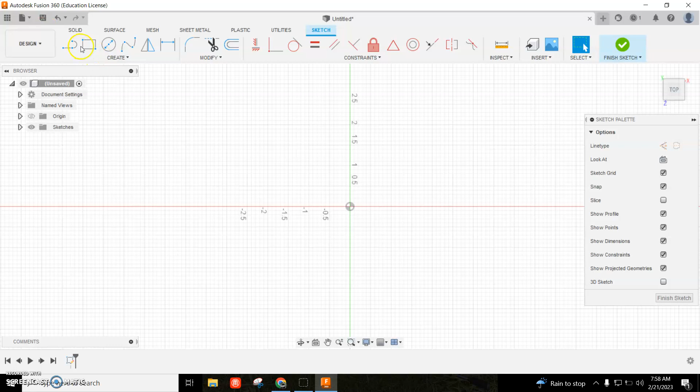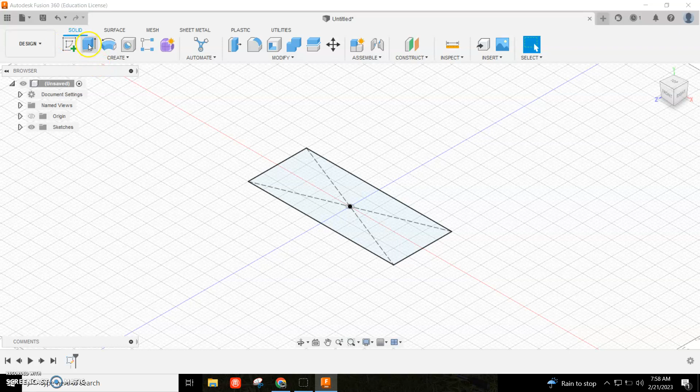So I'm going to click over to Fusion, and I'll do a center rectangle that is 5 wide. Wrong computer - 5 wide, tab 2, hit enter, finish my sketch, and then I'm going to extrude that up 3 inches. Fusion's working a little slow on me here, but I'm sure it'll be okay.

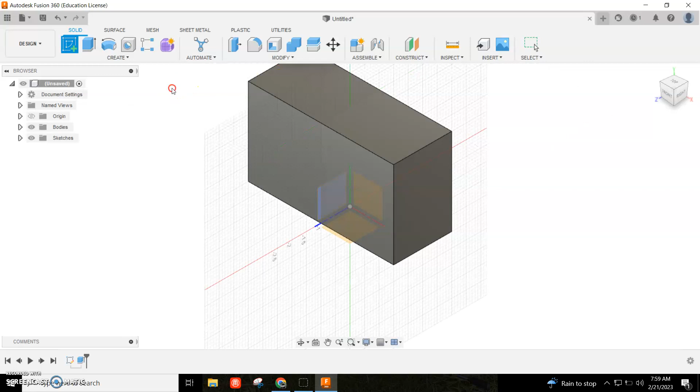Okay, now I'm going to go ahead and put these holes in. So the first hole is just a 1/2 inch through hole that's straight through. I'm going to go ahead and use the hole command, something I rarely do.

I'll go up here to this one and change it to top view, and move this onto my center line and place it right as close as I can on that center line. I'm going to make that... I'm sorry, 0.5. So 1/2 inch.

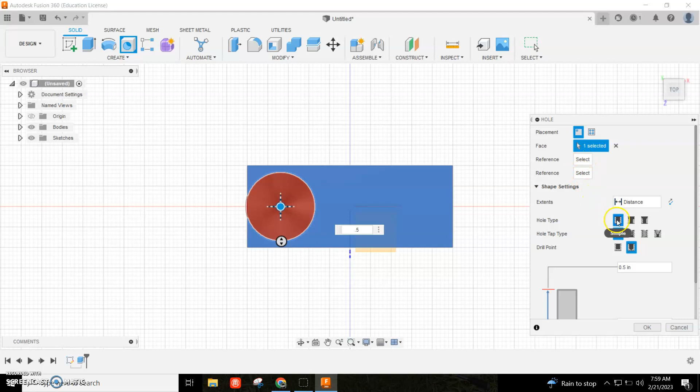And then it's going to be a hole type. It's going to be, let's see, 0.5. Depth, I need to change this to 0.5. And the depth will be 3 inches, because that's the thickness of my block, so it'll go through. I'm going to go down here and hit OK.

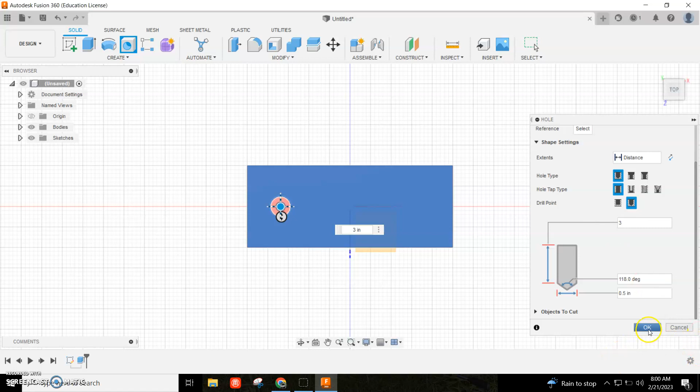Alright, so first hole's done, and that's very simple. That's just a hole. I could have made it with a circle and extruded it.

The next one is a hole that is 0.375 in diameter to a depth of 2 inches, so it doesn't go through, it only comes down 2 inches. And then it has a counterbore, 0.75 to a depth of 0.5 inches. So this is a little more complicated.

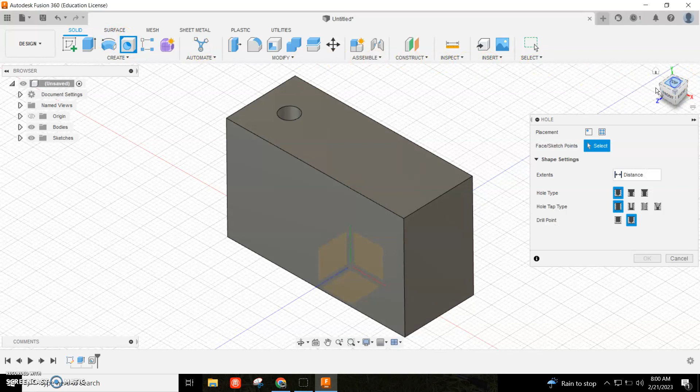So go ahead and use my hole, and then I'm going to come over here and choose that for my face. And for the depth it's going to go 2 inches down. That is a diameter of 375, so the diameter is 0.375.

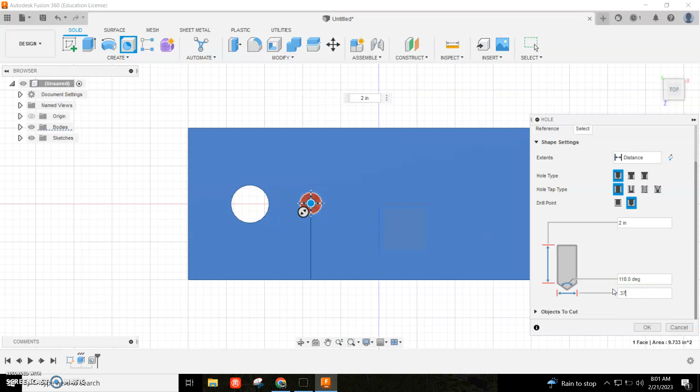Okay, I apologize, I stepped away for a moment. So on here now, I have a hole that is 0.375 inches in diameter, and it is 2 inches deep. And now I have to do the counterbore.

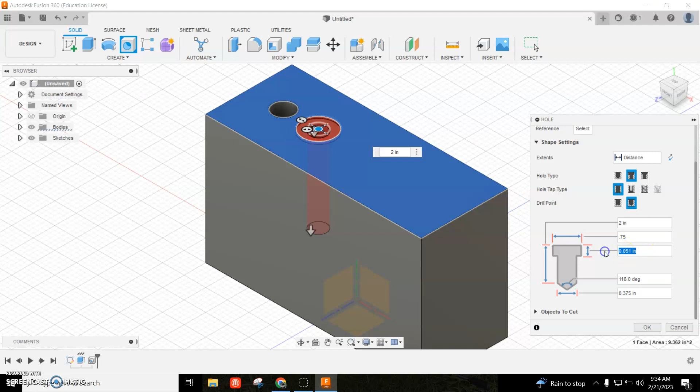So refreshing my memory here, the counterbore on that is a diameter of 0.75, and that's to a depth of 0.5 inches. I'm going to come in here and change this hole type to counterbore, and that's going to pop up some new things. So this right here, which is the diameter of the counterbore, is 0.75, and the depth of the counterbore is 0.5. So now that is correct.

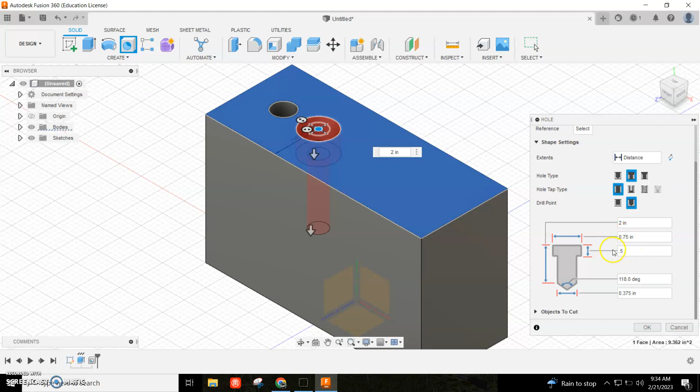So I have the depth of the hole is 2 inches, the diameter of the hole itself is 0.375... and then for the counterbore I have the diameter of 0.75 to a depth of 0.5. Okay, alright, let's go back to my sheet.

So this one is not counterbored, but rather it's countersunk. That means it goes in at an angle. So first thing I'm going to do is my hole, 0.25 inches in diameter to a depth of 2.25 inches. Alright, so put a hole.

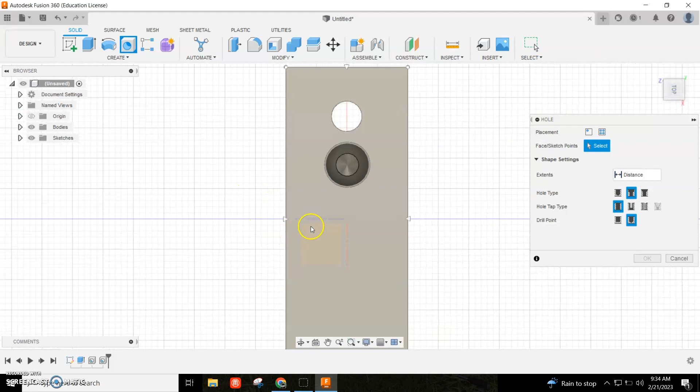I like to do the top version, and then place it right there. And now I'm going to bring it back to this view here. Okay, so this one is going to be countersunk.

And I'm going to do some work here. So the hole itself is 0.25 - so that means this is a 1/4 inch - and the depth, which is this one over here, is 2.25.

Alright, I'm going to go back to check, and then the countersink is a 1-inch diameter at 82 degrees. So 82 degrees is a standard, and this needs to go to 1 inch.

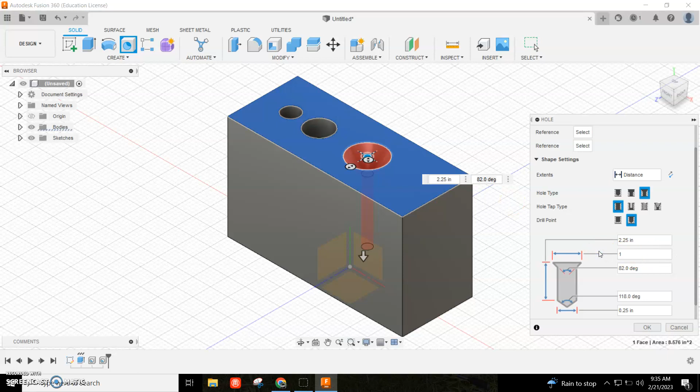That is correct. Now I'm going to go back to this one, the last one, and that is another counterbore. So the first thing I do is I look - this is a 0.5 inch diameter hole, and it goes all the way through. So I'll go ahead and do that real quick.

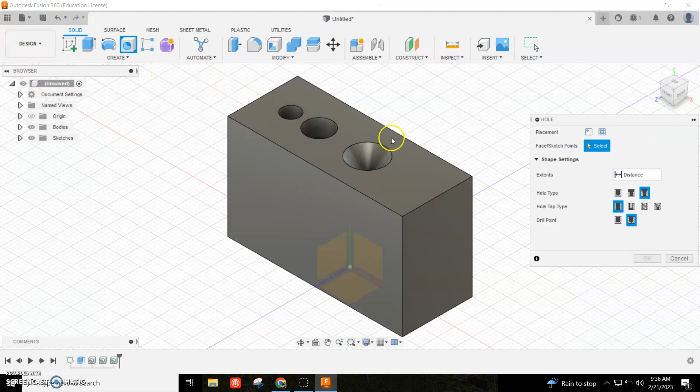So, hole, top view, and place it right there. And this is going to be a counterbore.

Okay, a little bit, and then go back and check. The 0.5 inch diameter hole is through, so as this is 0.5, the depth needs to be 3 inches.

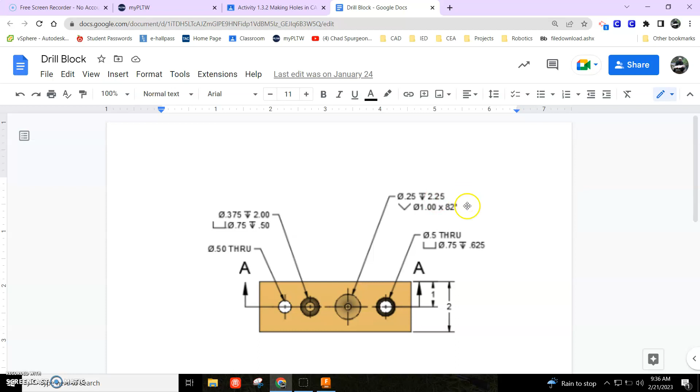That's going all the way through. And now I look at the counterbore. The counterbore is 0.75 to a depth of 0.625. So the counterbore is, I just said it, counterbore is 0.75 to a depth of 625. So that is correct already.

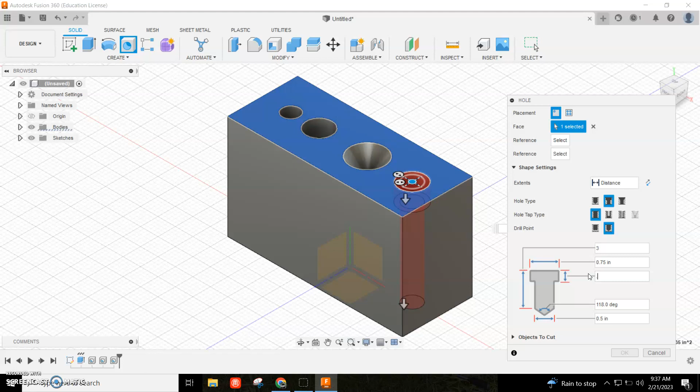This needs to be changed to 0.625.

Alright, so I have done everything I need to as far as creating it. Now I'm going to take it back apart. So what I'm going to do is I'm going to save it, and I'm going to save it as drill block. Save.

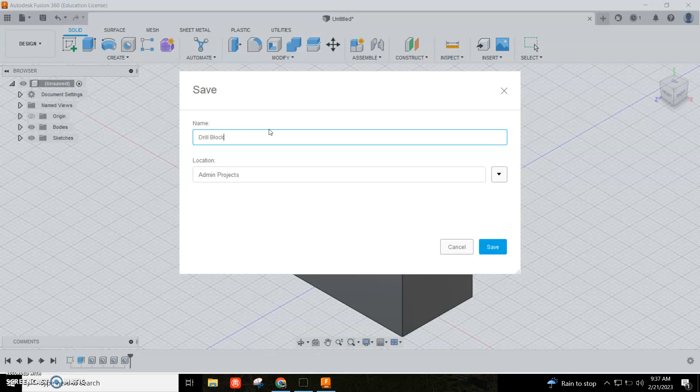And then I am going to come over here and hit a drawing from design. Hit OK.

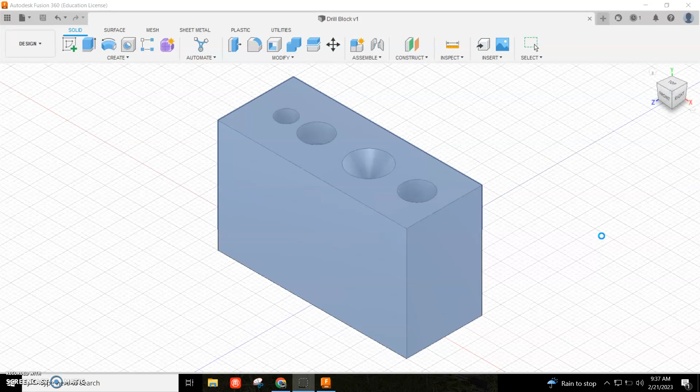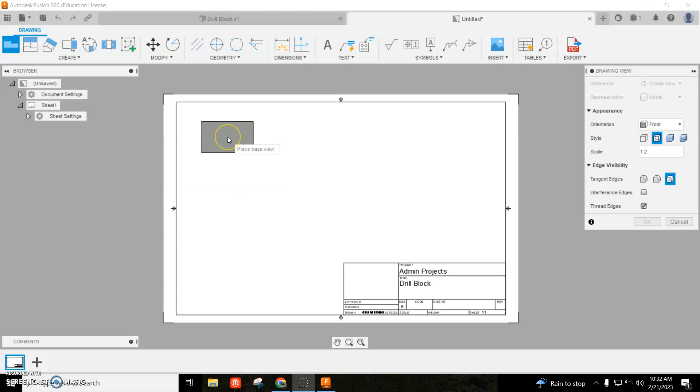Okay, so my drawing is opened up, and I'm going to go ahead and place the base view in the top left hand corner, and then hit OK.

Okay, now I'm going to try to make that look like this with those two drawings. So in Fusion here, I'm going to move this down here, and then up here, projected view.

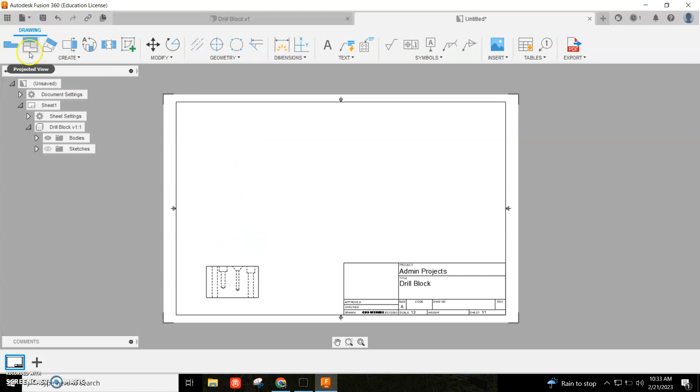I'm going to project this, I'm going to put a top view there. I'll hit the check mark. Then I'm going to do a section view.

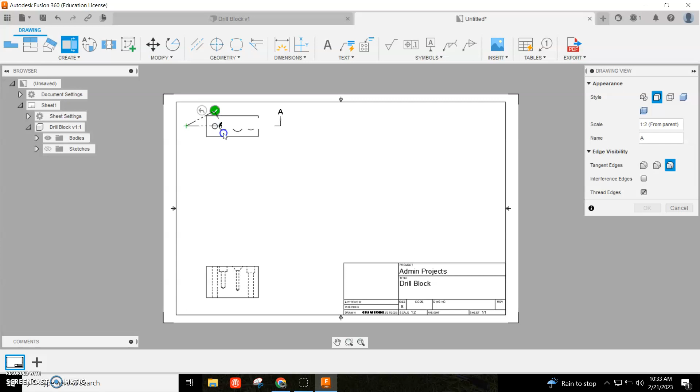So section view, click right on this midline here and drag out. This is called a section line. I'll hit check mark, and then when I come down, you can see it gives me a view that has it cut through. Obviously that looks pretty much like this.

These are hidden lines here, dashed lines, these are solid lines. But what that represents is cutting through, which is a nice thing. I'm going to take this and move it down a little bit.

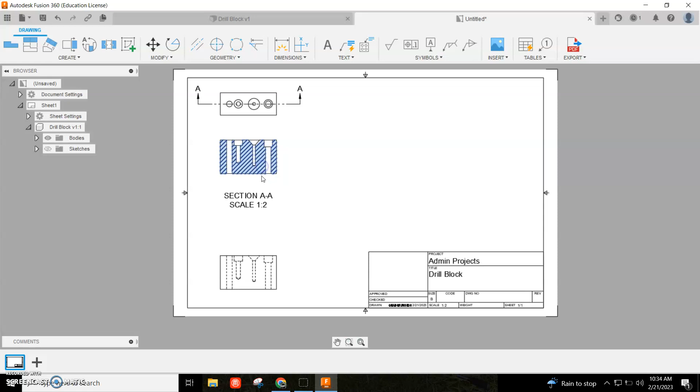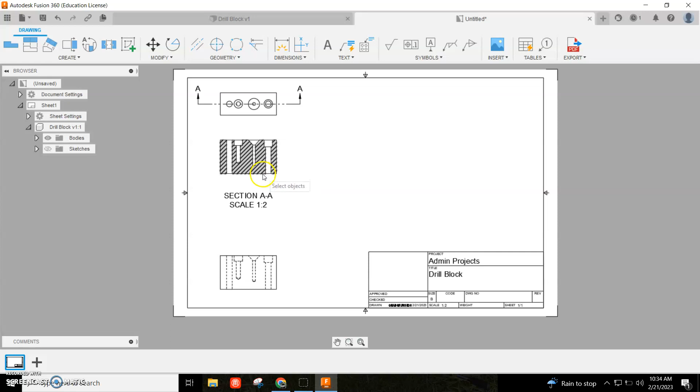Let's see, how do I grab it there for a second? Move this. It feels like I should be able to drag it. Drag it. I'm going to pause while I figure out how to drag this down.

Okay, so what I've done is I've erased that. I'm going to go ahead and recreate it. Come up here, check mark, and then I'm going to bring it down. And I just did it again.

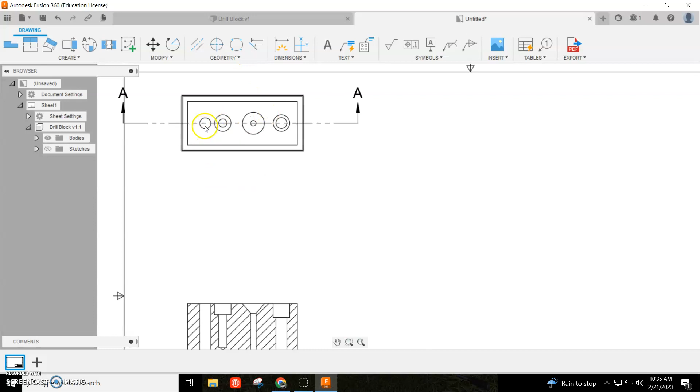So all right, so now what I got to do is I got to go ahead and label these different holes. I'm going to label them to do this. So I had to understand what these symbols meant, and now I'm going to relabel it. So again, I'm going to do this.

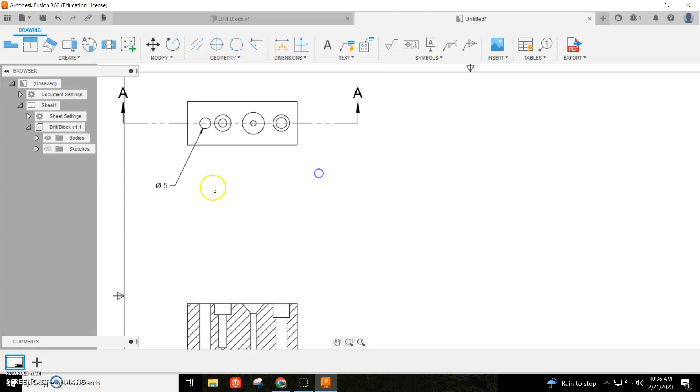So I'm going to label that first one as a 0.50 through hole. So I'm going to come over here and hit dimension, and put that, and right click and hit OK. Come over here and double click on that, and when I double click on that, I get some things pop up. Alright, so I'm going to hit there, and then the symbol.

So I don't want to use a symbol, instead I'm going to type. What am I going to type? I'll come back here and check. Through, which is spelled capital T, capital H, capital R, capital U. So capital T,

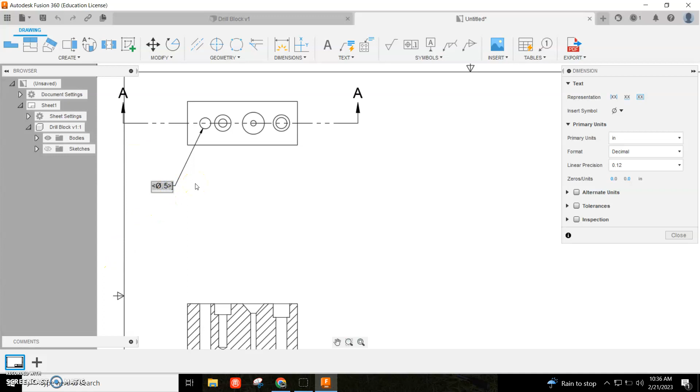So the space bar. Through. Let's see if that looks about right. Yeah, there's space there. Click out of it, and I'll click on that again. Put space here to make it look nice. And I believe that I've matched that up pretty well.

Alright, so the first thing I'm going to do is I'm going to label the 0.375 hole to a depth of. Okay, I'll click on that to open it up. All right.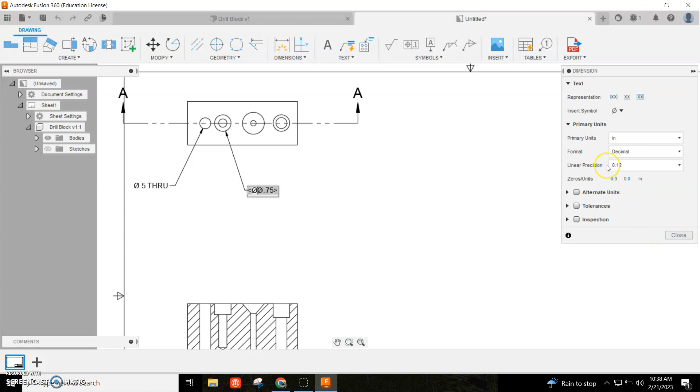Okay, I'm going to have to do symbol. That. That's 0.375 to depth. My depth of that is 2 inches.

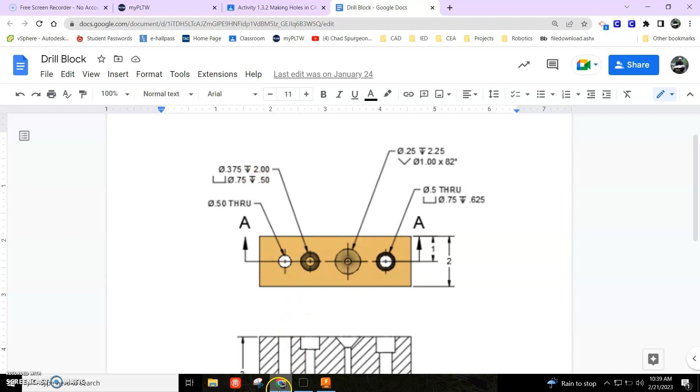To get to the next line, I have to hit Shift Enter, not just Enter. So Shift Enter, not just Enter right there. And then I need to go 0.75. So I want counterbore diameter 0.75 to the depth of that. So counterbore symbol, 0.75 to a depth.

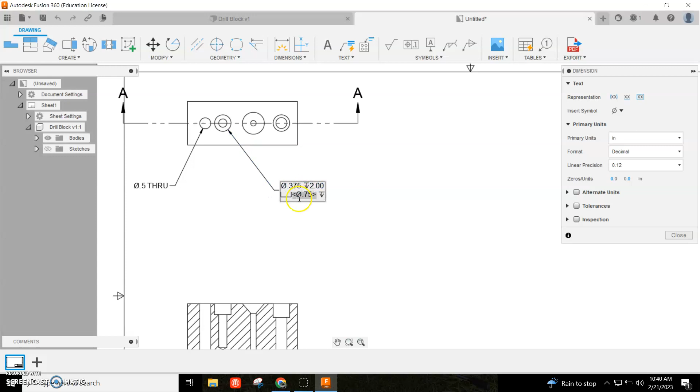Alright, so that has everything that I want. Check it, make sure that looks nice, and it does. So I reuse that. I think I put a click on that. Oops. Put a space there between the counterbore and there. That looks pretty nice.

Alright, so then I'm going to go through and do these two. That kind of shows you the pattern I'm running.